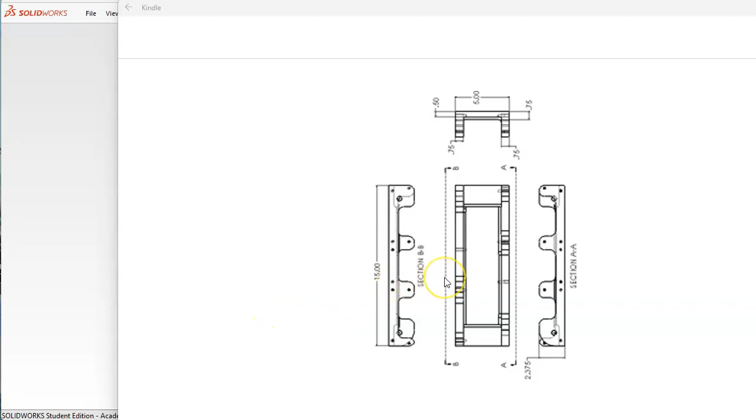Okay, so when we do our drawing, we're going to clean this up a little bit. I would not call this a best practice for the section views, putting a section view on the outside and pointing towards that face. Maybe they wanted to highlight something, but if this is my front view, this is my left view, this is my right view, and this is my top view, I don't really need to make those sections. If there was some detail, or if we put the section view on the interior and pointed it, we might be able to see some of this inside geometry a little bit better.

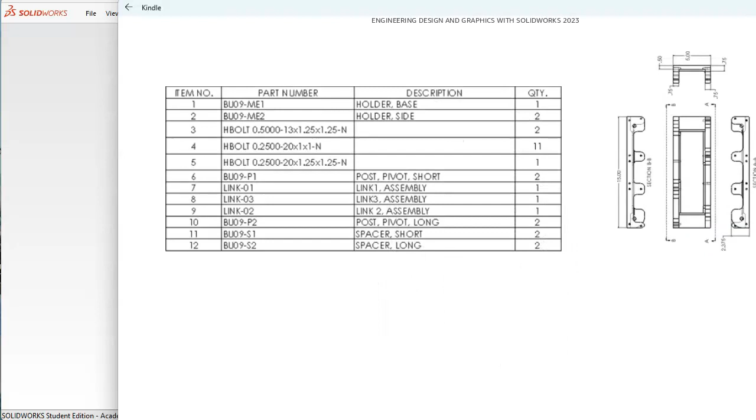All right, so there are multiple drawings here that they ended up with. I'm going to probably stay with these and refer back to the other one.

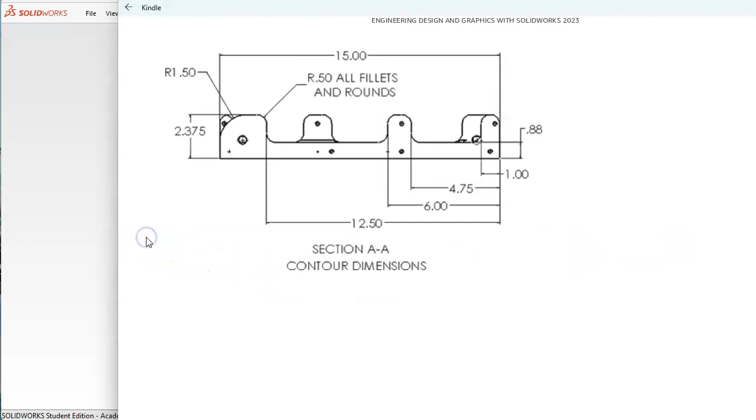All right, so the section AA, if you wanted to call those out in higher detail on additional sheets, I just think there are better ways to say that this is the right side view and the left side view and whatnot. Minor critique, but it would help with the readability.

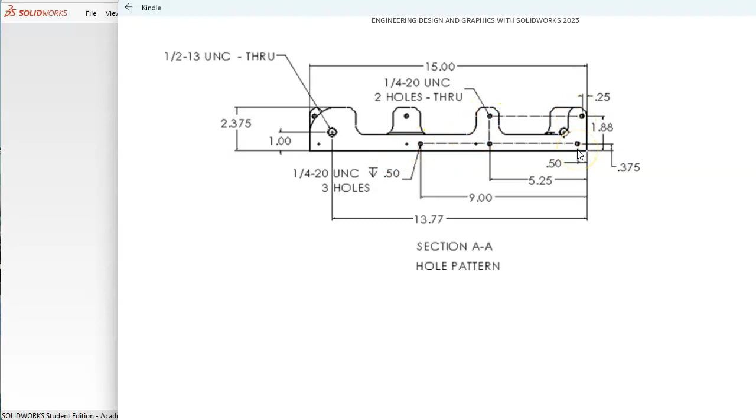All right, so we got the half 13 - that looks like one of the small ones. Yeah, we'll have to check. So half 13 on this side, quarter 20s on those, quarter 20 for 3. So 1, 2 - well, this is only going to be in this view, 1, 2, 3. So if that's a quarter 20, then yeah, the 281 should go that way. All right, well, we'll get this sorted out and we'll make those changes when we need to.

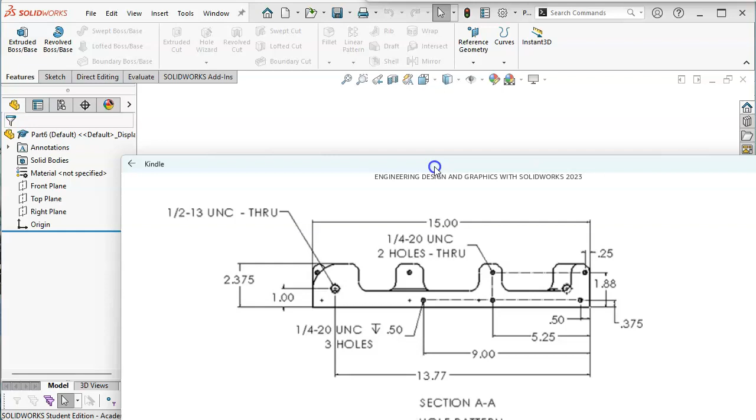So new part, inch, and we're going to go to the front. Let's see where that internal geometry is. So, dimensioning to the hidden lines - yeah, there's still some strange things going on here. So let's close that out.

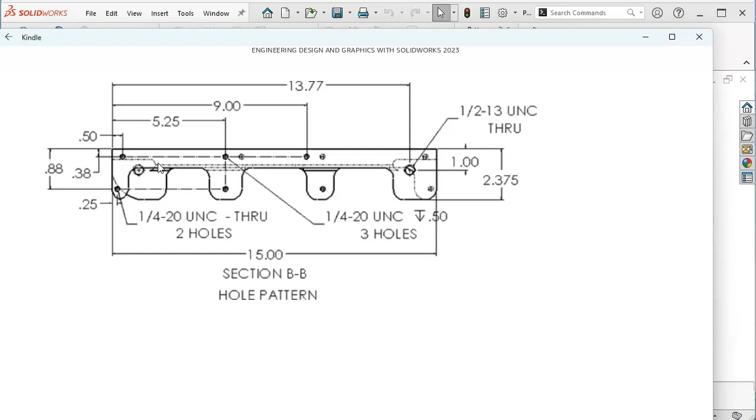Got the 1 inch and the hole pattern, then we're back to that. And that one looks like I didn't catch that before. That almost looks like a complete undercut. So I would have thought that would have been a fillet, because that just made this a very expensive part if you're going to try to blend those into that corner that way.

All right, so things that you notice the second time that you look at it. Let's see, the 0.88, and then the fillets and the radius.

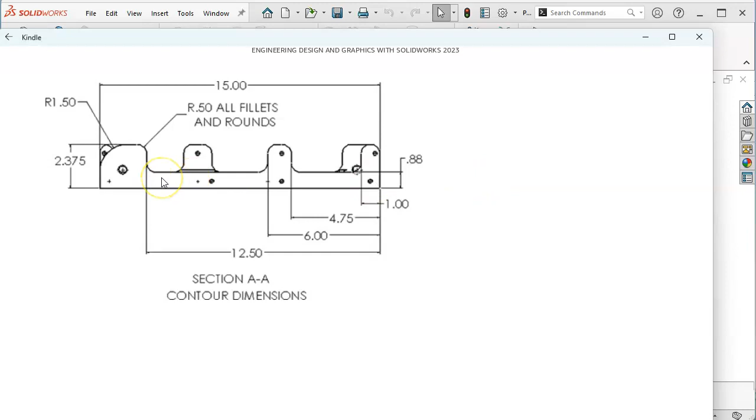All right, well, let's start with this one, and we'll get the geometry in, and then we'll worry about the holes after. So we need to pick a side, and we're going to go up over. Again, I'm not going to worry about all those fillets and rounds until we get a little further in.

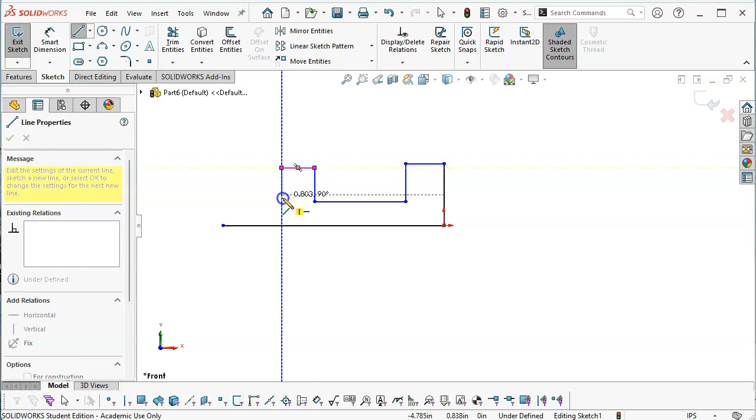And we'll just start building now. What I would do in industry versus what I'm doing here - I would make a really big mess out of this if I was doing this for a part that I was actually going to build.

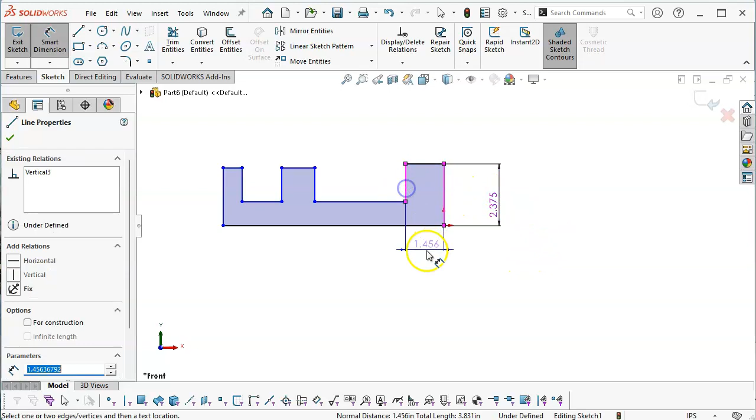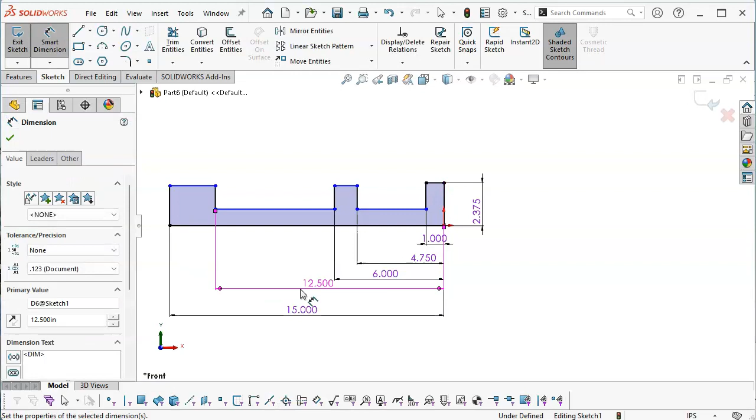So let's see, we have the 4.75 - no, 1 inch, and then we go to the 4.75, and then to the 6 inch, and then to 12.5. Oh, probably should make that 15 real quick. And then we can go to the 12.5. And we are the same height all the way across.

So select, control select, collinear. And again, we could also do point, point, and make those horizontal, or a line and a point coincident, line and a point coincident. All right, should be at the point where you are able to decide on those relations.

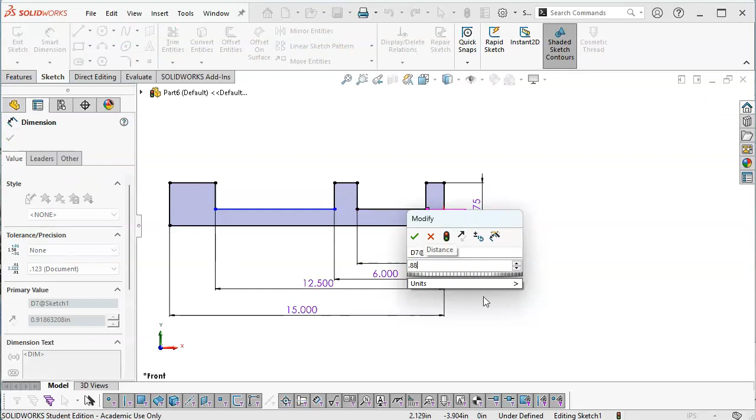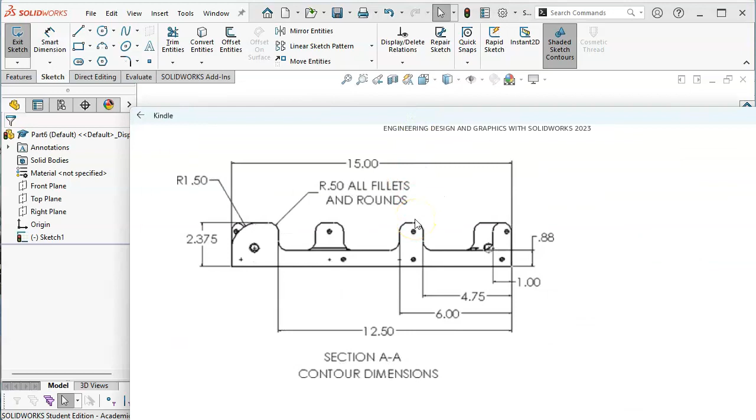Yeah, no, there's still that geometry work that goes into the blend. So let's do one of those as a point and a line and coincident. Again, I tend to go to the lines mainly because they're the easiest to select, biggest targets.

All right, so let's find our side geometry, and 0.75 and 0.75 with an overall of 5. So we can go features, and then I have to decide if I'm going to build this way. And since this was the front view, I'm going to go that way instead.

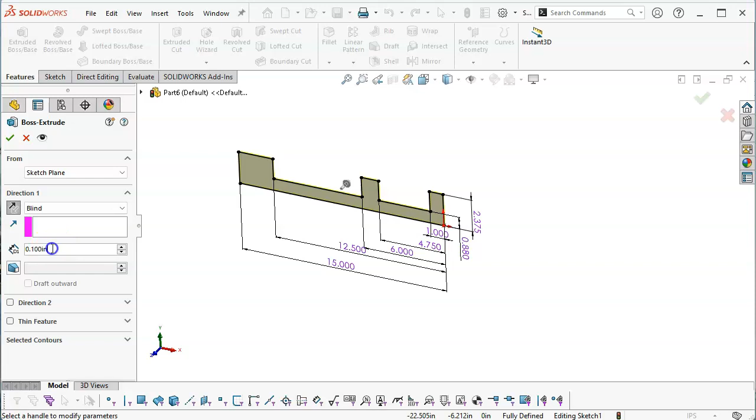0.75, and OK, I want to stay in that same view, so we'll open up the sketch, but I want to draw on this side, so I'm looking at the same geometry.

Let's see if we can zoom up a little bit. That one's not very descriptive. It does look like it's still coming around there. All right, so 0.75 to the tray, or to the inside of that base.

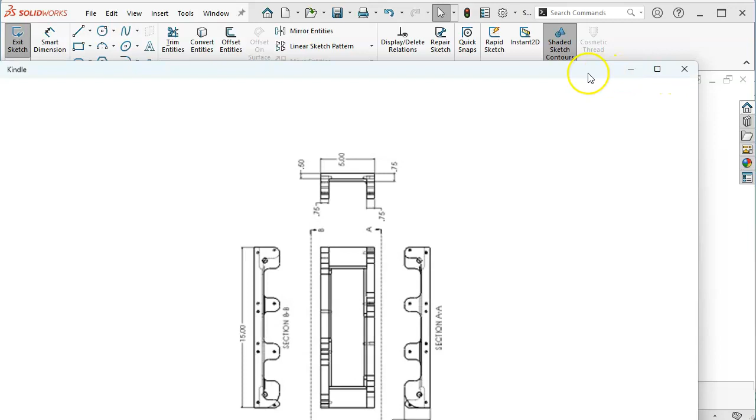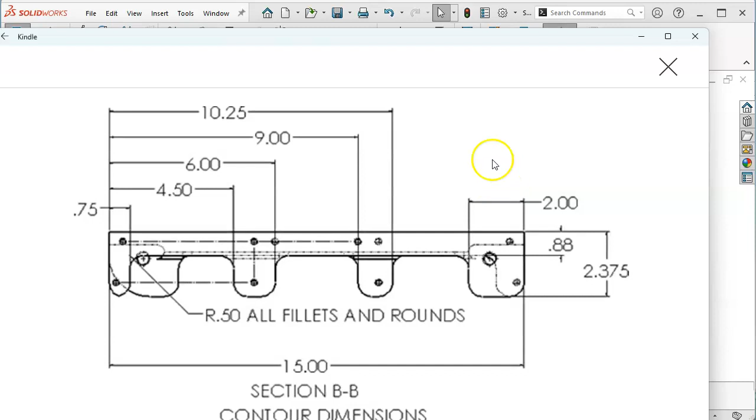And then we'll try to decipher what's going on from the views with the hidden lines. So yeah, either that's a weird blend for the fillets, or it might be the weird blend for the fillets where it comes into the radius, but there's a lot of geometry. Since it's not very well called out, we'll go ahead and make our best determinations. So that looks like it's even with the 2-inch.

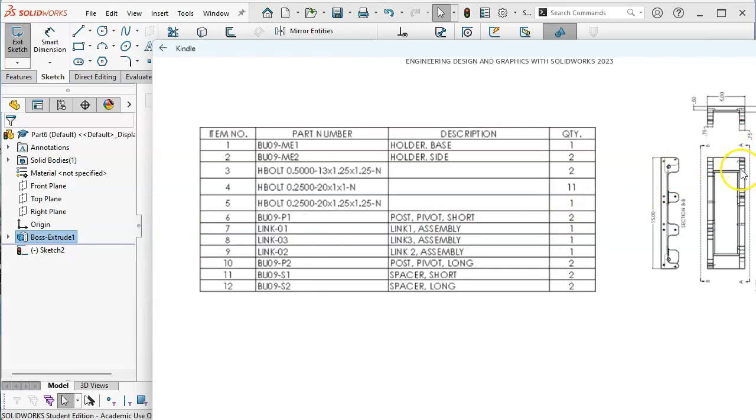There, try and visually figure out which side I'm working from now. The AA. And so let's just say that we'll start off with the 2-inch. See if there's anything over here. Yeah, I would just look at this being a flat plate across the bottom and being done with it. That extra geometry, I don't really know what purpose it serves.

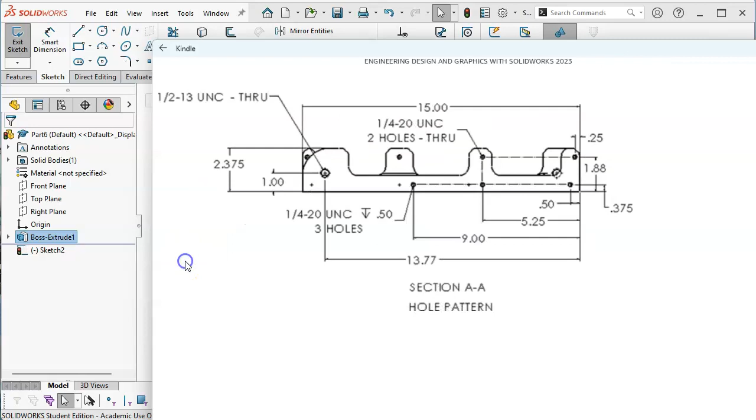Let's see, the 0.75, and then on this side we had the 0.5 to the step. All right, so I think I got that pretty well sorted out. That it's going to be the same geometry.

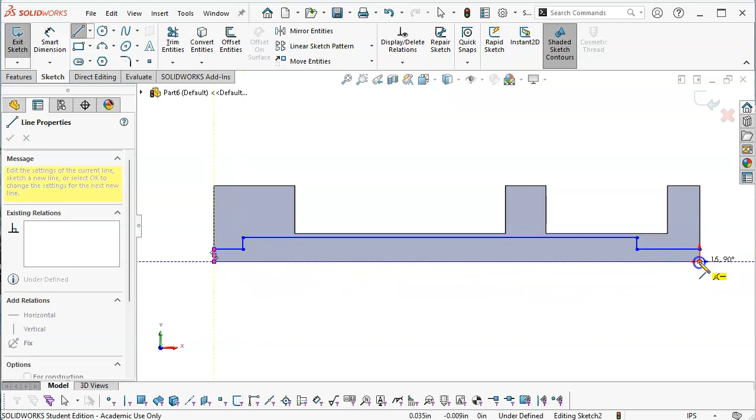Let's go ahead and sketch a little bit to the interior, and back over. And I'm going to go ahead and tie these together. And that was a little bit of a mess. Maybe? No? Found it. All right. Thought I overshot that one.

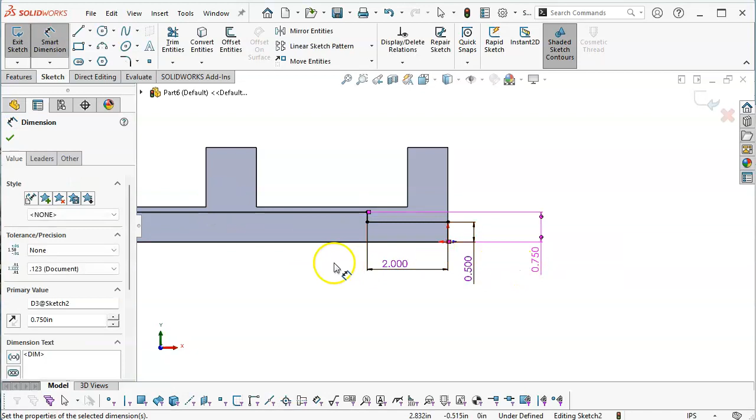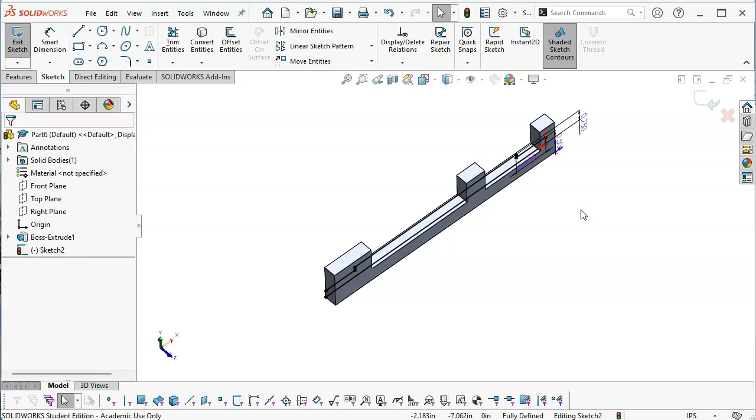So 2 inches, 0.75. And then the other choice, let's just go collinear. And while I'm here, I'll make it equal. And equal was just a little bit outside of the frame on that one. All right, so if I have to do the math: 1.5, 0.75 plus 0.75 is 1.5, 5 minus 1.5 would be 3.5. So let's go extrude boss base.

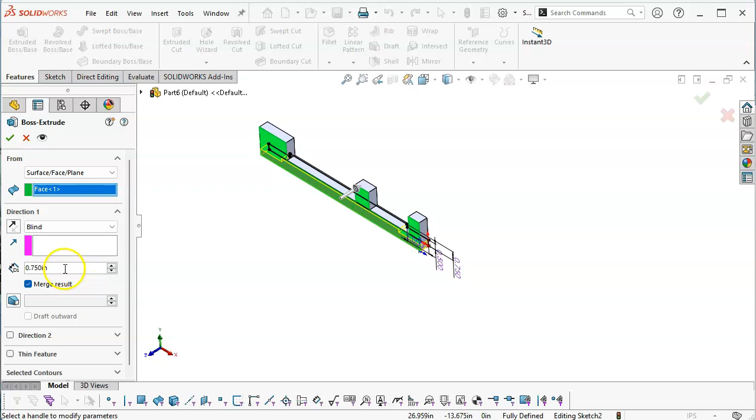And I can use that math, or since there's full intersection on the geometry, I could pick the surface as my starting point and give it a blind condition of 5 inches. And then when I extrude the other side, I just got to make sure that I'm extruding into the part, and we are merging the result. All right, so 3.5 should work out when we get back to it.

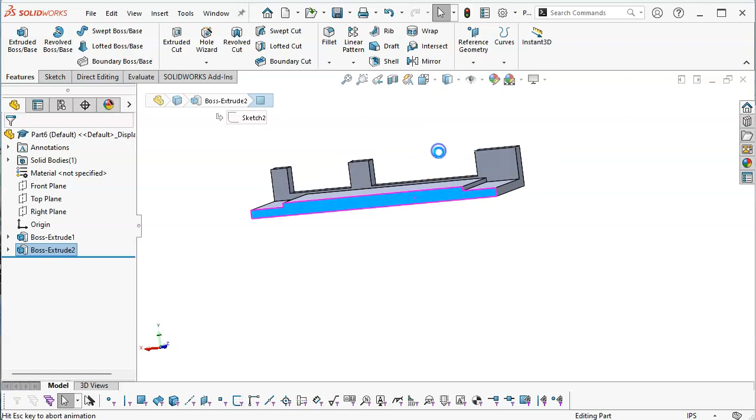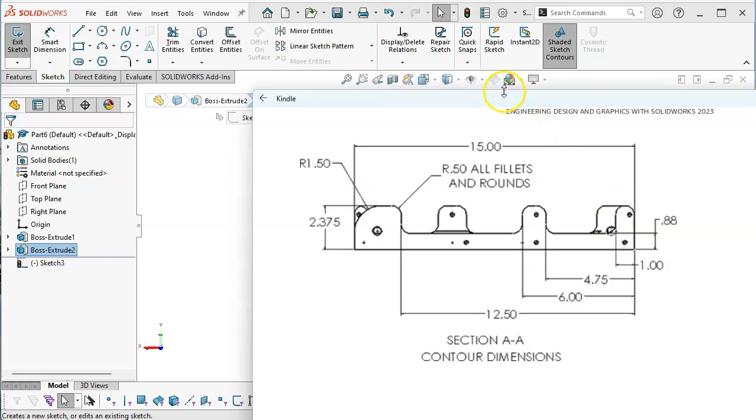All right, so we'll open up the sketch this way. Now, based on that geometry, let's close the zoom. And that was where we started. And then we come back to the other side. All right, so small tab, large tab, small tab, large tab. So that kind of makes sense.

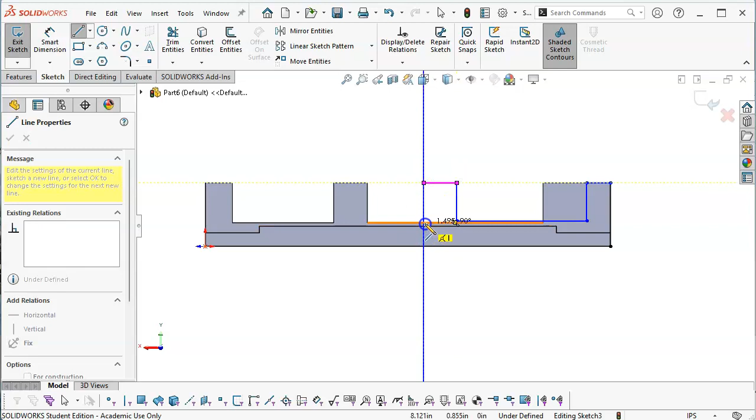And we'll float that out of the way. All right, so I'm in my sketch. I should be able to reuse some of this geometry as the relations. And we'll just sketch all of this in. And it's going to go to the overall, and then back down to the start.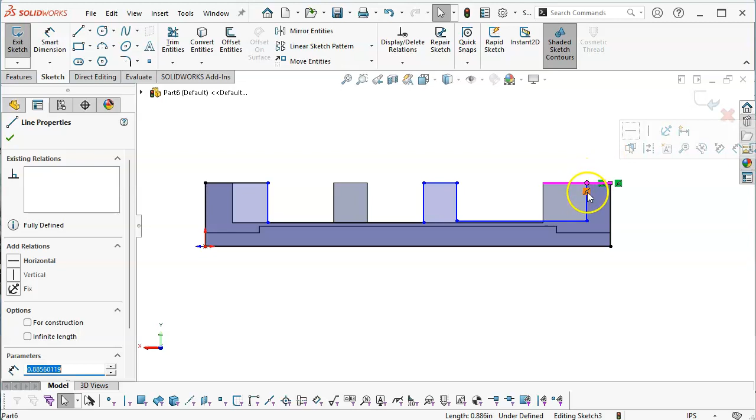All right, so other than that one, horizontal, let's see, did I miss that one? Apparently I did. So that one went coincident to the edge, so coincident and coincident don't really need a horizontal there. That one got the horizontal, that one I added the horizontal, and so one of these will just make collinear since it's relating to that other side. If I thought that these were going to change height at all, then I'd worry about it.

So here's my thought on design revisions, looking into my magic crystal ball of design intent. Going forward, I'm not sure that we need to remove all this material and make this as expensive a part as it's going to be.

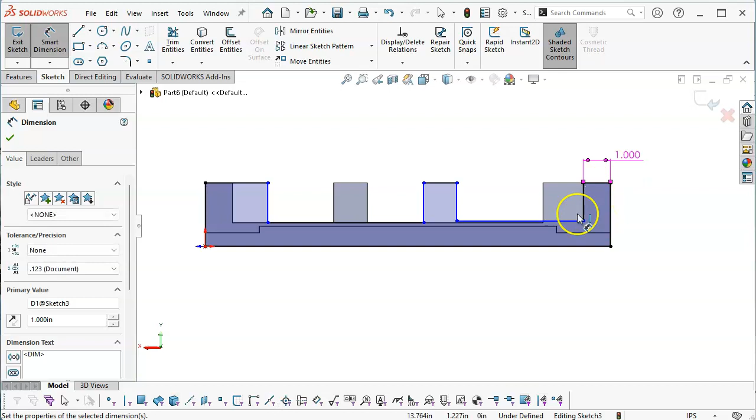If it needed these extra supports for the frame, the holder side, I would still be not knowing the loads, but I would still be tempted to just say eliminate all of this. We'll strengthen the base a little bit, put our side holes in here, and mount directly to this inside. That extra rigidity, even if this is a casting, it still works out to be a much more expensive part than it needs to be.

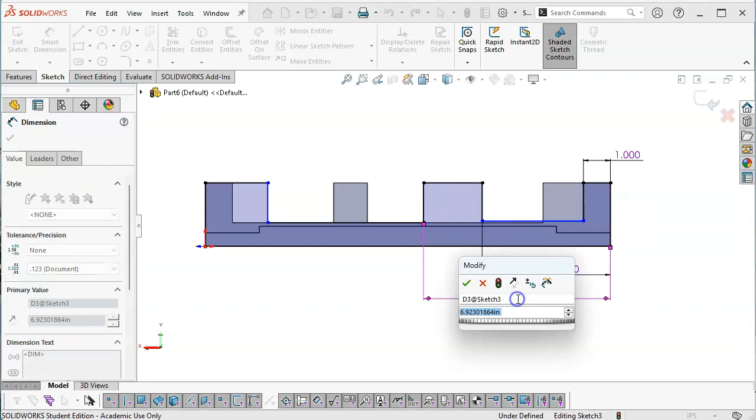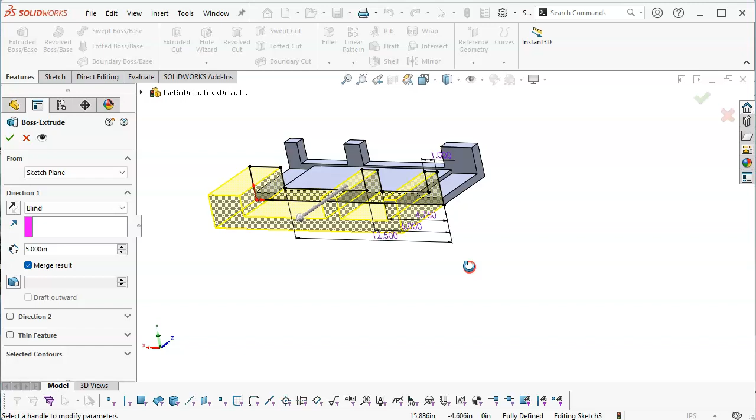All right, and then the last bit of blue, everything moves up and down, so let's go select, control select, collinear. And that gives me my geometry, so features, extrude, and then we just have to be a little careful because it's going to want to go that way, but we really need to go back into the part, and then we'll do a quick double check of our numbers. So control 7 to go isometric.

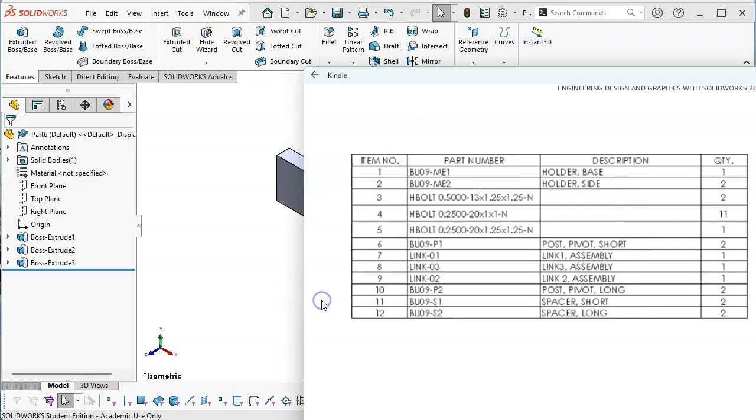Okay, I'm not entirely sure which way that I went. I might have told that first extrude to go the... No, that's it. Okay, so visually, check, recheck, check again.

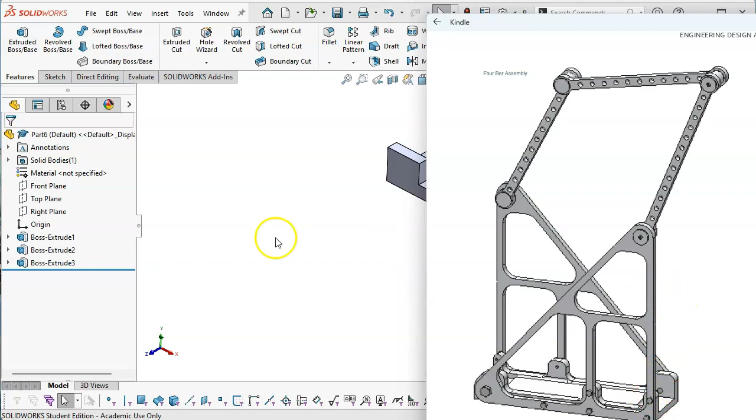And get the movement out of the way. So the small, yeah, I'm still not seeing those posts. But anyway, the small, the large, the small, the large. Make sure that I'm looking at this correctly.

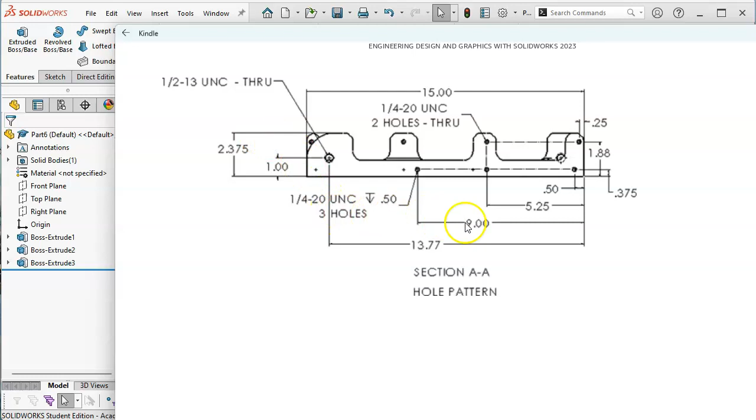Let's slide back over here, and we have the geometry for the 1/2-13s and the 1/4-20s. They did not give us a hole depth. There's plenty of material, so that would be one of those 0.75, anywhere from 5/8 to 0.75 deep. So let's put in the 1/2-13 first.

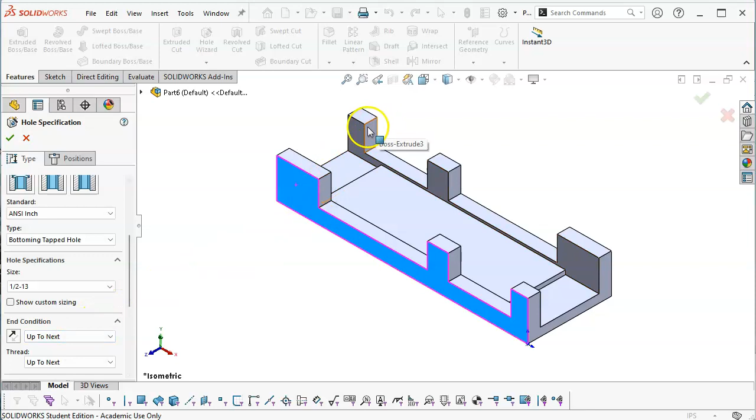And, oh, I slipped back into a sketch. No, so we'll just get out of that, and I will go back to the hole wizard. And we're looking for threaded holes this time. And we're going to go to 1/2-13. And it's going to be an up to next, because through all would find this other geometry, and that wouldn't be so good. All right, so into our dimensions,

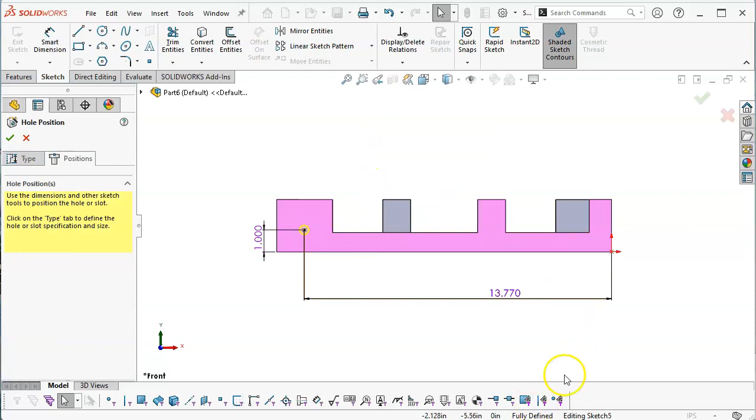13.77, 1 inch off of the base. And that should be good. We have the fully defined sketch. That one will go in place. We have the relief.

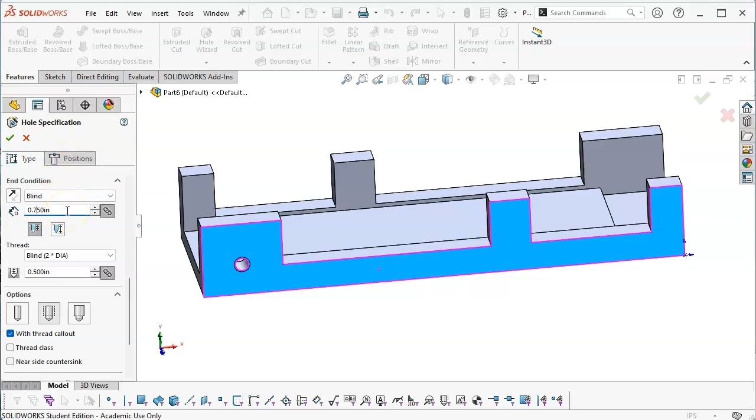So our next hole wizard, we're going to be looking at a 1/4-20. And the depth's going to be blind. This time, though, the half. And like I said, a little bit more is better. The other thing we could do is switch it to the tip. But if I were to go 0.75 to the shoulder plus the tip, that would end up being around 820, 830 maybe overall depth. And if it was going to interfere with anything, then we might put a dimension that would keep it from breaking through our geometry.

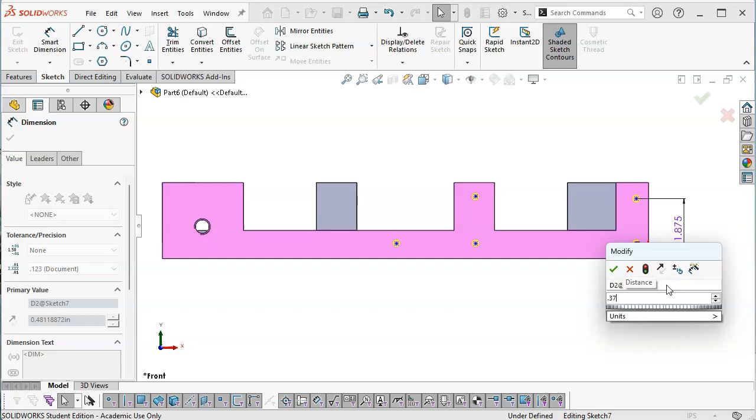So we have the 3 holes across the bottom, 2 holes across the top called out, and these were the 1.875. And this is where we would see the potential mismatch. If I were to make this 1.88, because I made the other one 1.875, and I happen to use these to add the mate relation, that would create a little bit of a problem. All right, and it would be something that we'd want to correct, or it would allow it, but say that it was misaligned.

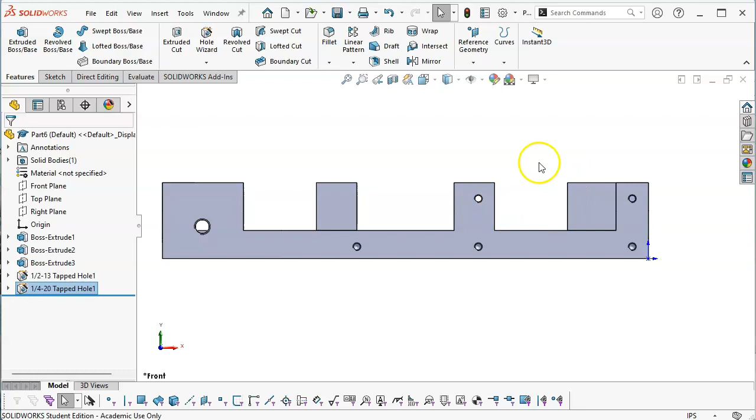So 0.5, 5.25. So this time I have added my dimensions first, that there's no specific order, that I can go back now and make all of those horizontal. And then those two, select, control, select horizontal, select, control, select vertical, select, control, select vertical. All right, so that one manages to go through.

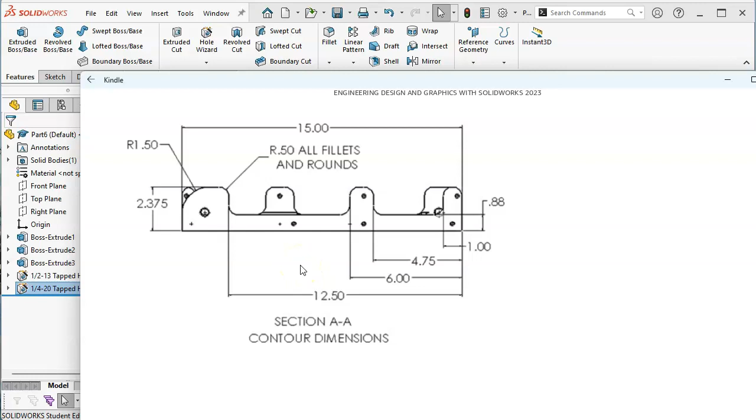And that would be another advantage of making it 0.75, that those as through holes, having those be blind, a blind hole, no great advantage there. All right, let's go to the other side. We'll double check our numbers. Should still pretty much be the same.

And the issue becomes here that the datum, if we were worried about tolerance, the datum goes a little bit to the other opposite sides. Does make it a little more, if there was a positional tolerance, I'd want to take it into consideration.

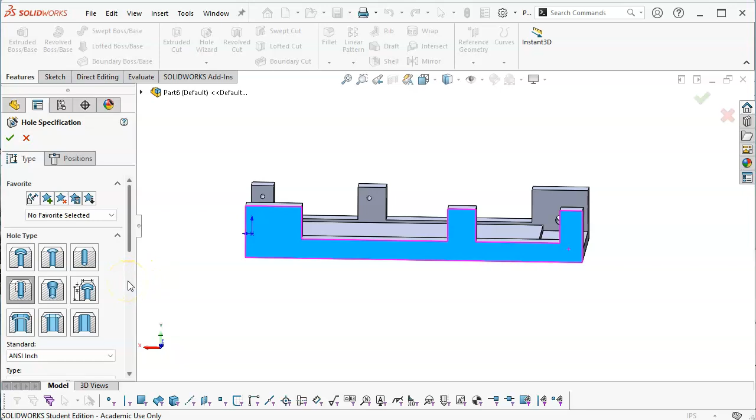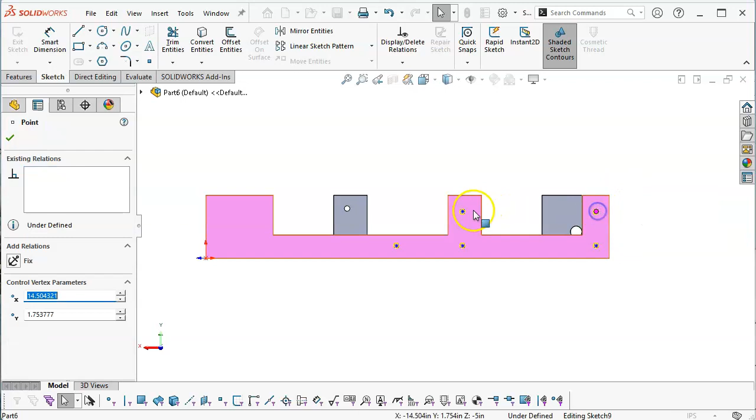So our 1/4 inch, 0.75. We again have the 2 holes and the 3. All right, so just to illustrate that it doesn't, most of the time it doesn't matter if you add the relations first or last. That as long as they get in there and you're putting the dimensions in place, they will all cooperate.

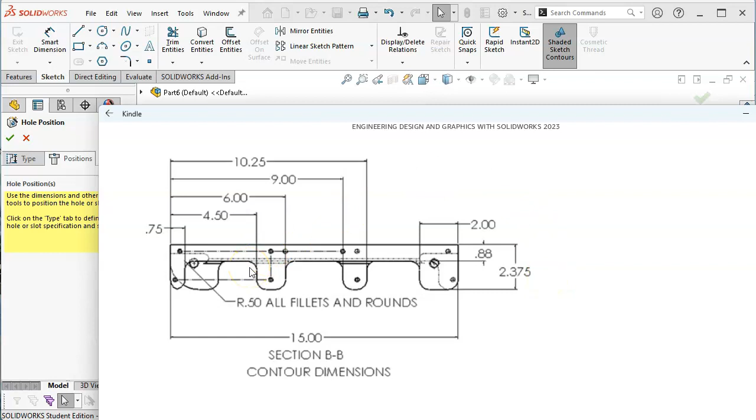All right, so let's see. So doesn't help that they turn this one upside down on us. All right, so the let's see if that, oh, that one's still the, oh, that one went to 0.75. All right, well, we're gonna have to go check that too then.

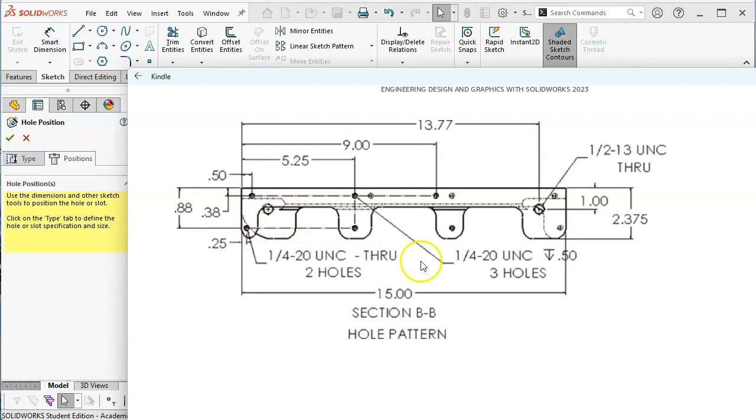All right, so 0.25 there and 0.5 there. Yeah, that's not gonna line up very well. All right, some things that we're going to have to address, since those were vertical in the sides. Not sure why all of a sudden that one would shift. All right, so the 2 holes, and we're going to the 5.25 to the 9.

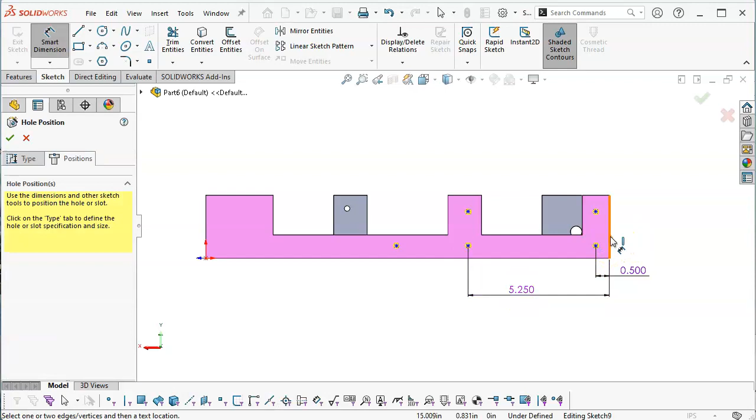0.375 - notice that one went to 0.38, where I'm pretty sure the other one said 0.375. And a missing dimension, 1.88. Or missing decimal, so that looks like it got cut off.

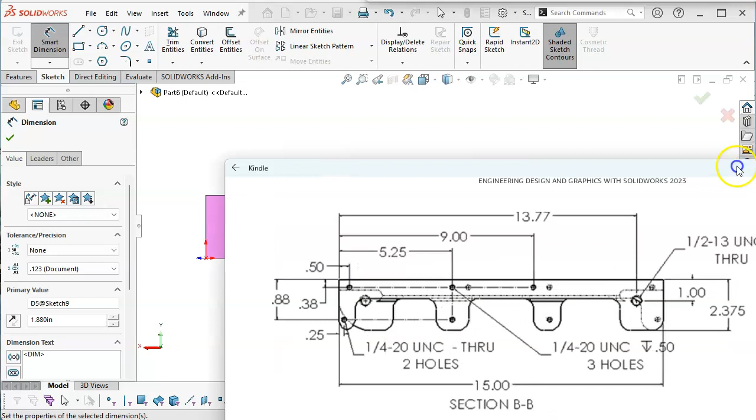And 1 inch to the center for the half 13. Maybe I didn't get out of the dimension there. Okay, well, let's add those relations, horizontal. Okay, got those. We're fully defined.

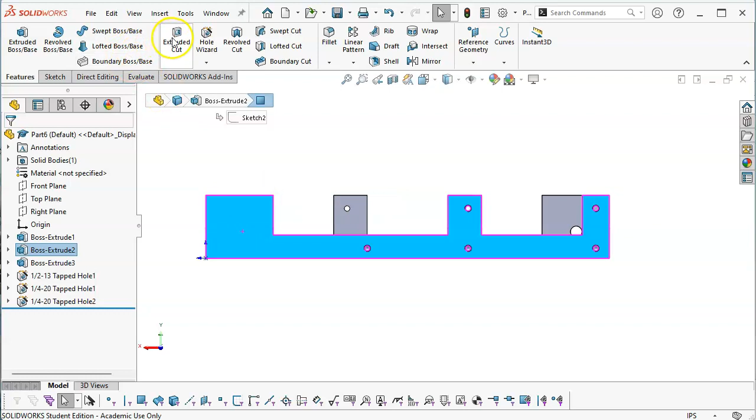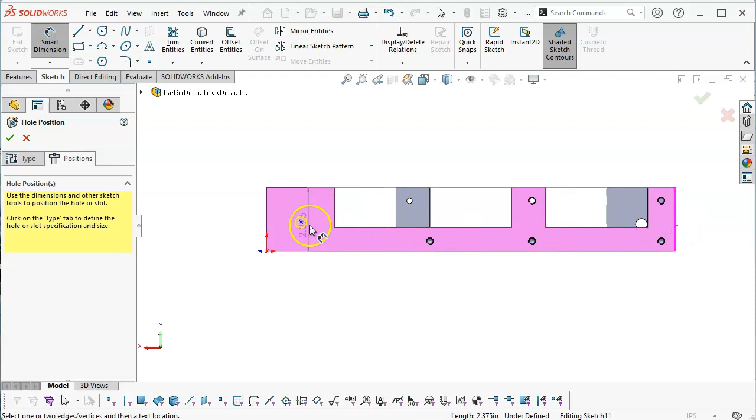We can accept, and we're going to go back into the hole wizard, pick our half 13. And this was an up to next condition. So position, and then select, and it goes back to the 13.77.

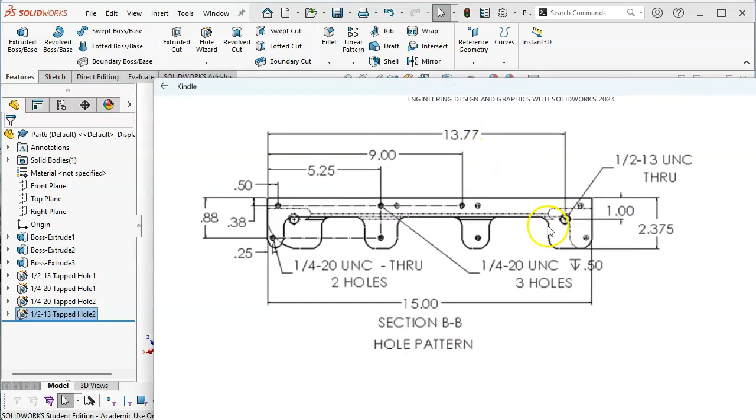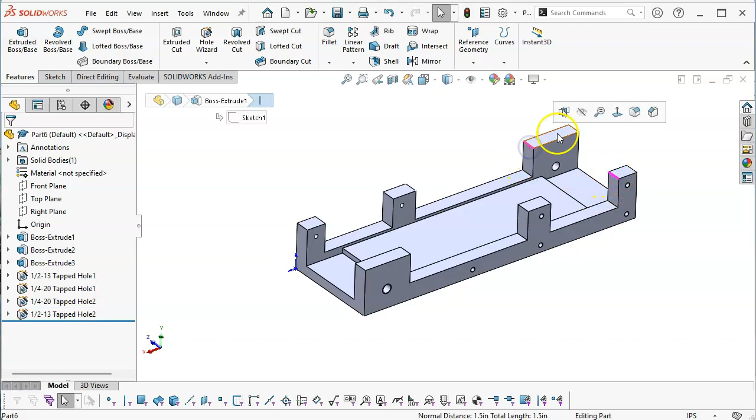0.5 on the fillets and rounds to the outside, except for the last one at 1.5. So I'm assuming that that is both sides. We're going to go fillet, and I want to put in the 0.5.

Oh, the next one that I add should allow me to find those. Nope. Connected? Nope. All right, I'm not seeing one that I'm going to like here because it pretty much grabbed everything. So in this case, we'll just go through and pick our geometries, all of our edges. So don't want the face.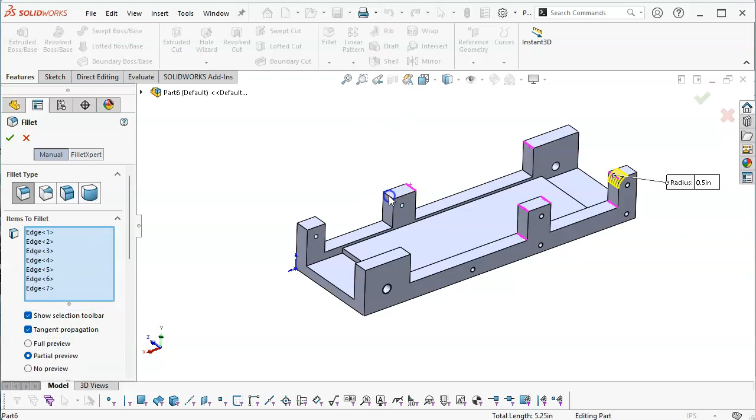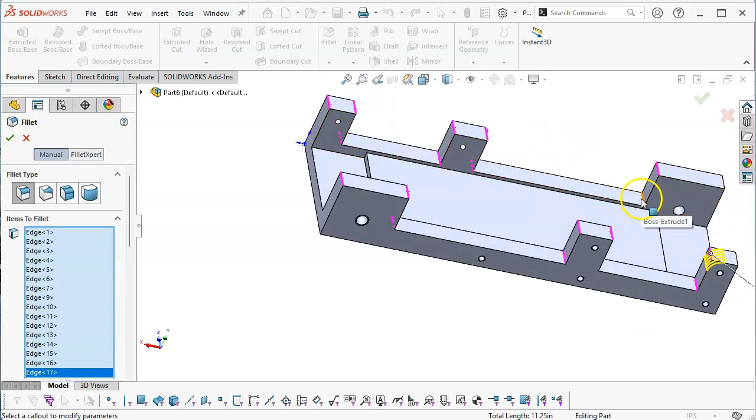And I'm trying to pick, zoomed out, which makes for a harder target to select. And we'll see which ones I missed. Ah, there we go.

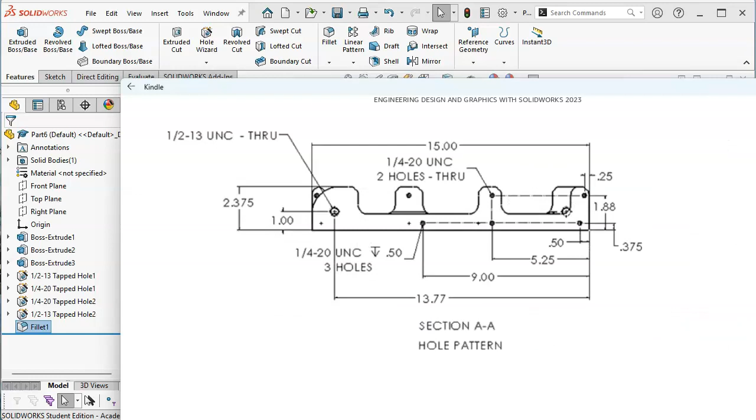Okay, so the 0.5s, now they show the inside radius, and because that went from 0.75 to 1.875, then that would be an 1/8 inch, but not necessarily called out anywhere - we're just assuming. And from there to there is also, let me go to a 1/4 inch.

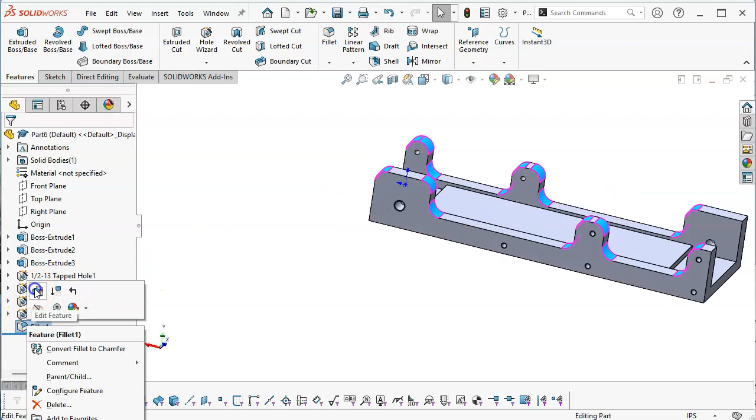Oh yeah, from the half to the 0.75. So I did get that one. Let's go back and edit, and I'll make sure to deselect that one. All right, so I think we can do a 0.25

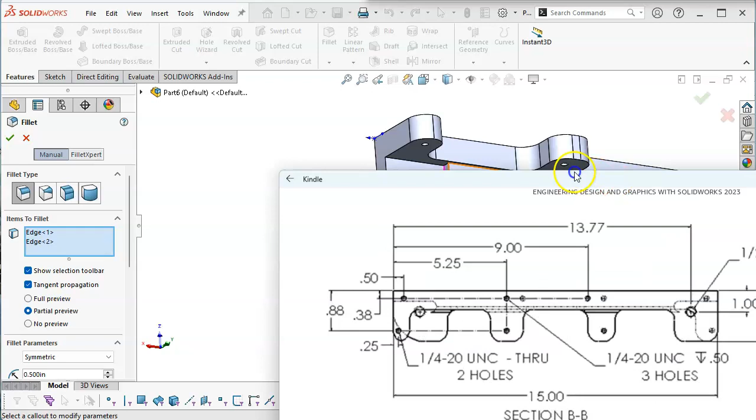from there to there. The problem becomes the fillet on that end. So still seeing the fillet and that coming around, but I think that that is part of the other inside. So that should pretty much take that edge out.

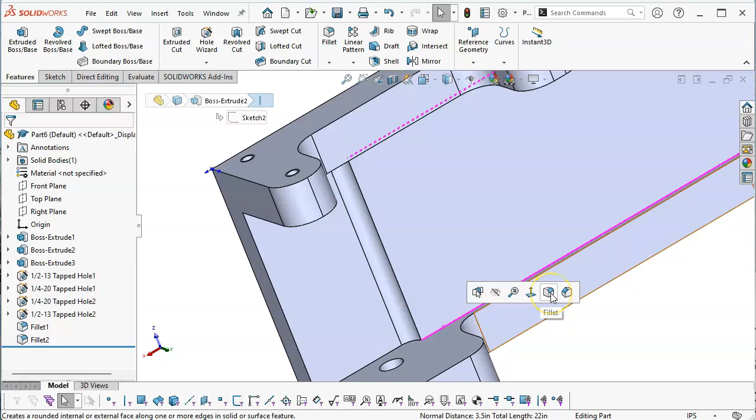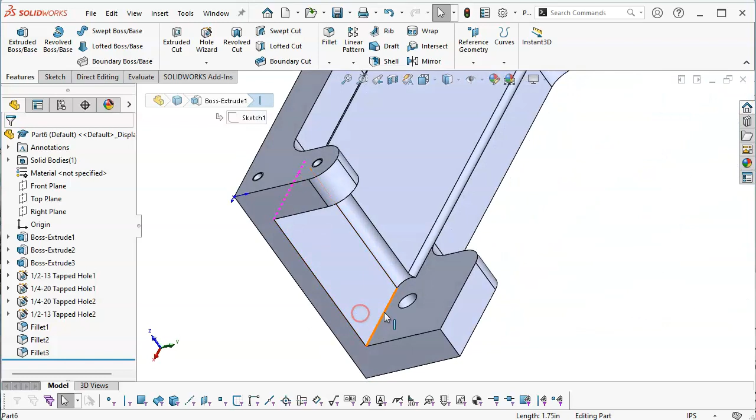And then we'll go 0.125. So yeah, that doesn't - that's still really strange. All right, so a ball end mill that deep, ball end mill that deep, at the very least, we're going to end up with a radius on that inside. So let's go ahead and see what this looks like with the

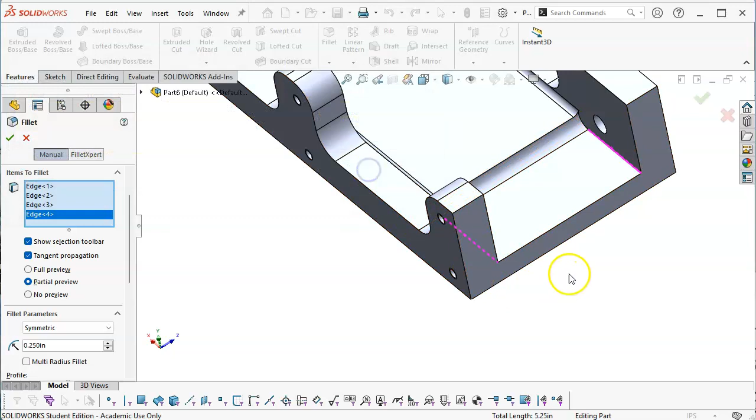0.25, because I can pretty reasonably find an extended length end mill and cut those. So it's not liking going into that blend. So let's just see if it'll do one and preview it.

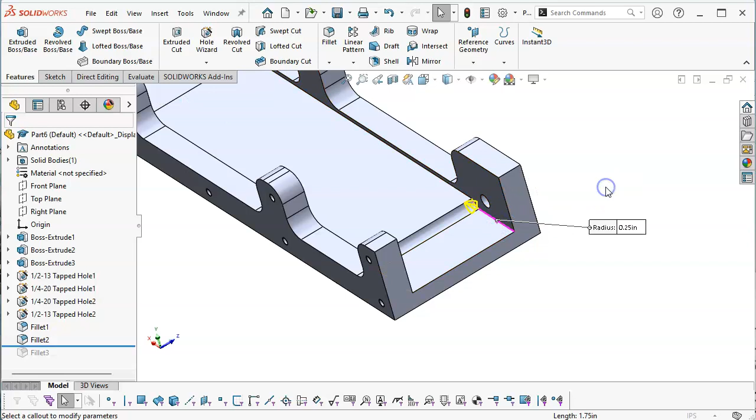Yeah, it's going to lose, so that's going to have to be a face, and where it goes into that one. Let's try to back that up just a bit and see if we put that one in first. Yeah, that's pretty much what it's going to get, and then we're going to be into the half 13.

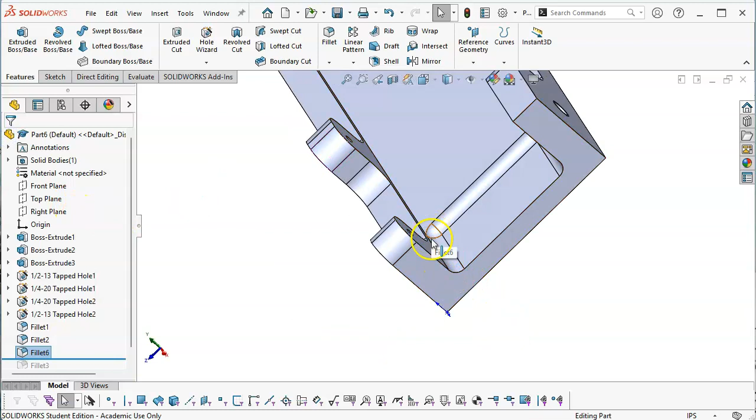All right, so I may have to go that way, and the order of the fillets going from largest to smallest. There we go. All right, so not going to be able to make that sharp, and then the blend into the other side. So,

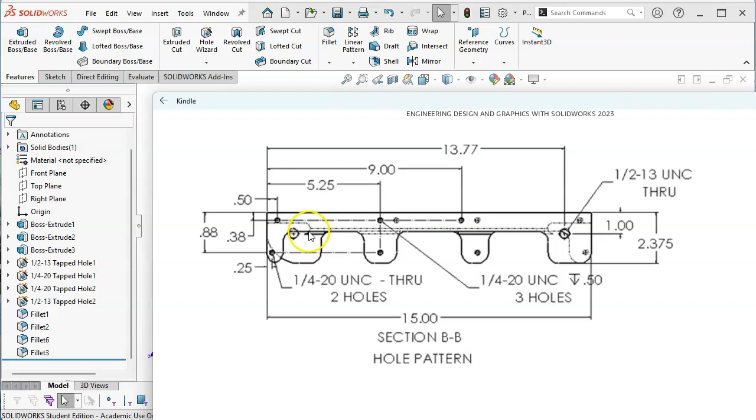all right, there's the majority of the geometry, and yeah, I'm not sure, still not sure what's going on with that undercut. Maybe I'm worrying too much about it.

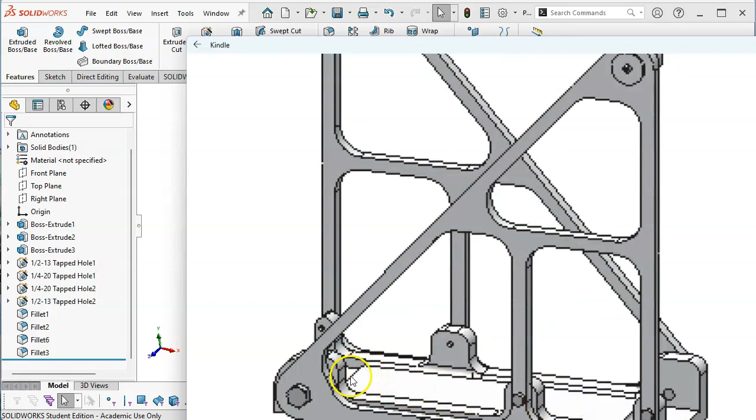Let's see if there's anything that shows up on these guys. Yeah, it's just really hard to tell what they're doing with that geometry and these overlaps. There's some things that don't make sense that would be up for design review.

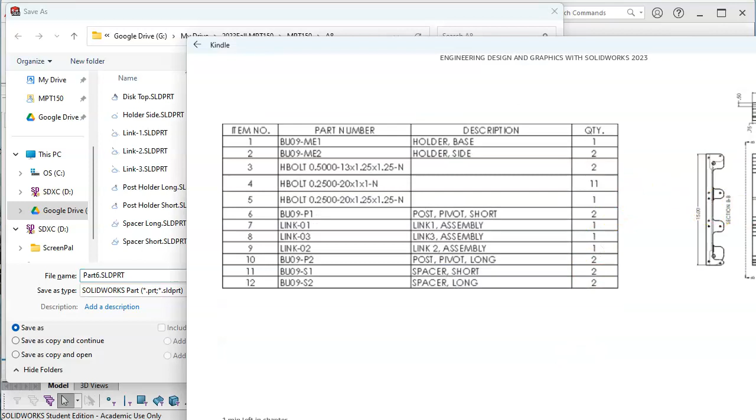All right, so let's wrap. Oh, I was living dangerously and didn't save this. So we need to save, holder base, and save.